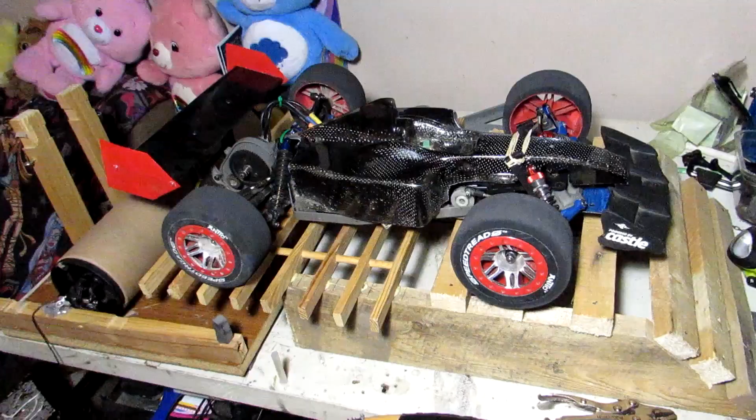We're gonna do a power run with it. I'll show you how it's set up momentarily here. On 2S, we'll do a power run, and then we'll compare that with a 3S. So hopefully this goes over well. So first we'll go over what the car is. This is Megas. He's built from a two-wheel drive Rustler. I guess you have to say that now because there is a four-wheel drive Rustler on the market.

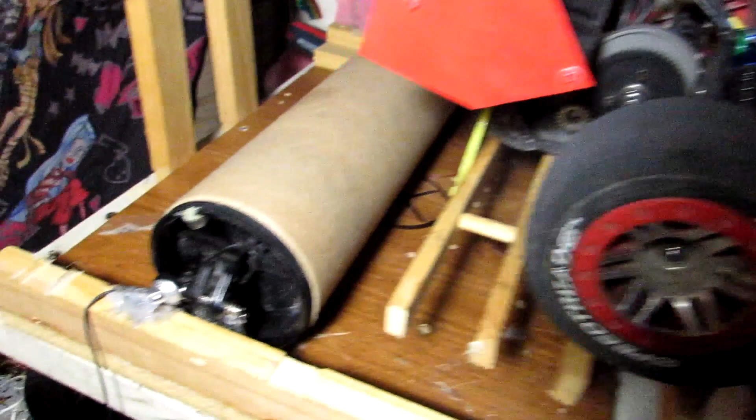And here's the dyno. You can see the magnet that I'm using for the sensor there. And then you can see the other part of the sensor being the headphone, and it's being used as a line-in or a microphone to be able to detect a blip every time that that magnet passes it. It's essentially how it works after entering all the information into here. So let me finish setting up this camera. I'll set the car on the dyno and we'll get at her.

Well, I thought before we jump into the action I should actually explain the software to you guys, hence why I've come back in time to re-record this segment. Don't ask. By the way, that's a lovely Dalewood, and the old Dalewood bridge that's gone, that's in the background.

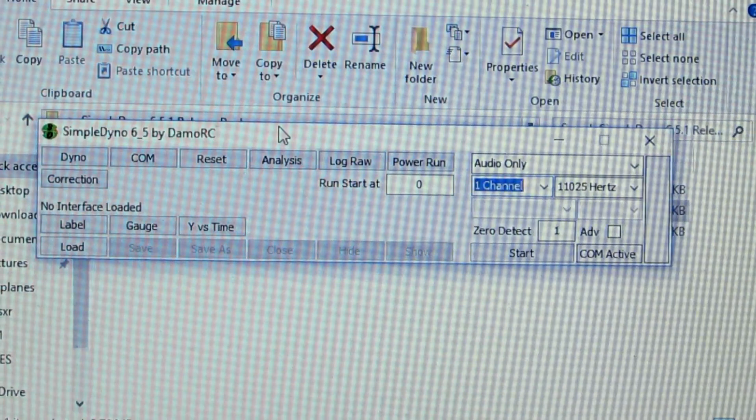Local thing. So the program we're going to be using, it's called SimpleDyno 6.5.1. It's the latest release package, and yes, it is a small program, it's only about 10 megabytes, doesn't take any resources to run, so the cheapest laptop could actually run this thing. So upon double clicking, this is what we see. So yes, there's a lot of information to go over, and as I figure it out, I'll explain to you guys. There will be more than just this one. This is why this is the dyno video number 1.

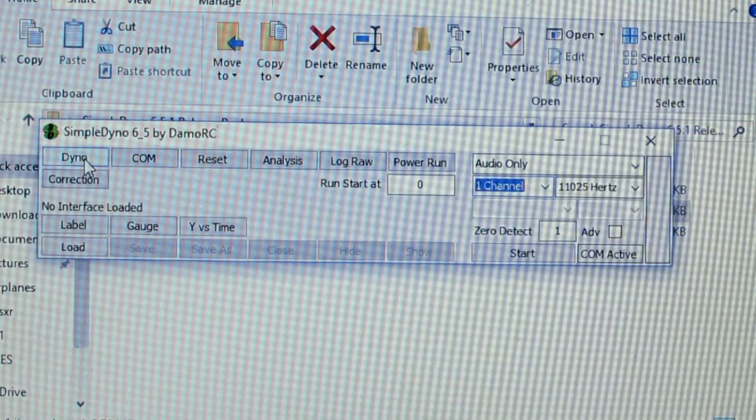When we start out looking at this, I guess the easiest way to show you is just to show you. We'll click on this button here, start with the very first. Where do you start with any of this stuff, right? So let's go right here, click on dyno, and this is what we get. This is where you enter in your non-critical parameters, so if you really have all the information and you want to add it in, this is where the non-critical parameters go. Fortunately, you don't have to enter that in, but this you do.

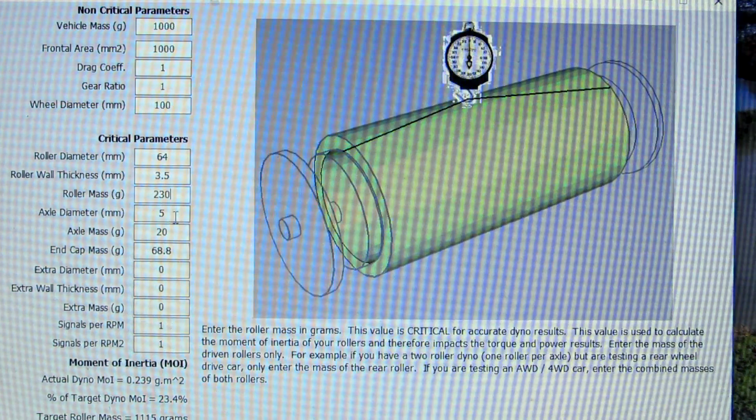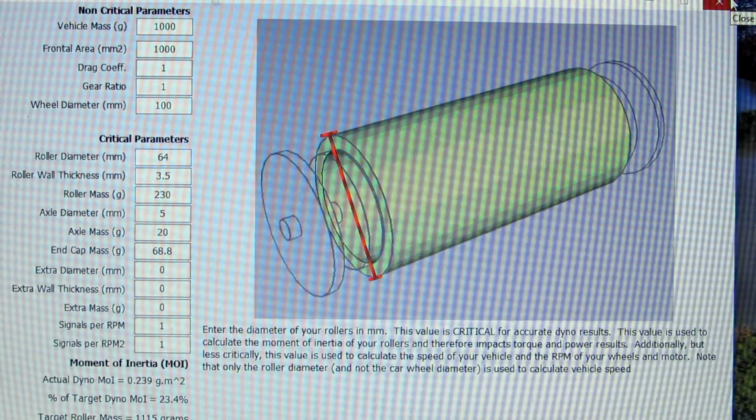And as you click on each different field, you see how the information changes. Everything down here changes as well. That's because they're giving you pretty detailed instruction of what each parameter is used for and why it's critical, and of course up here why it would be non-critical. So we'll close that so I don't accidentally change something important. And back to this screen, the COM button.

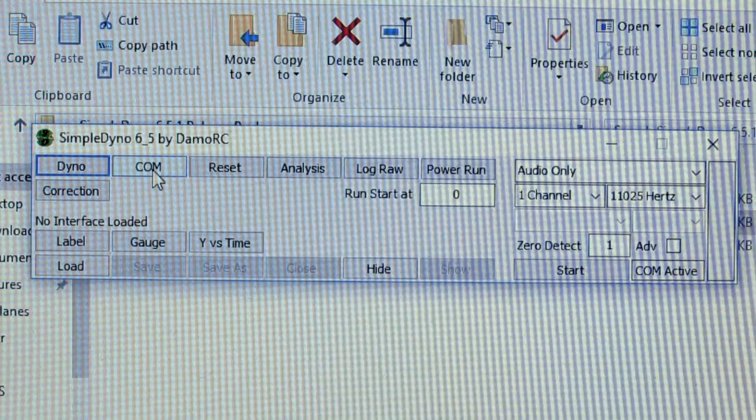What this gives you is access if you have the Arduino board that you can order. It's a pre-programmed board that you can hook up through the speed controller, and it records various information like your volts, your amps, of course wattage, the multiplication of the two. And you can cross-reference those with any point during the dyno run and see exactly what the car is doing. Helps a lot with tweaking and setting it up the exact way you're going to need it, or it might give you information on how to get more power, which is always great. But we don't have a COM, so we're not doing that. Reset button, pretty self-explanatory.

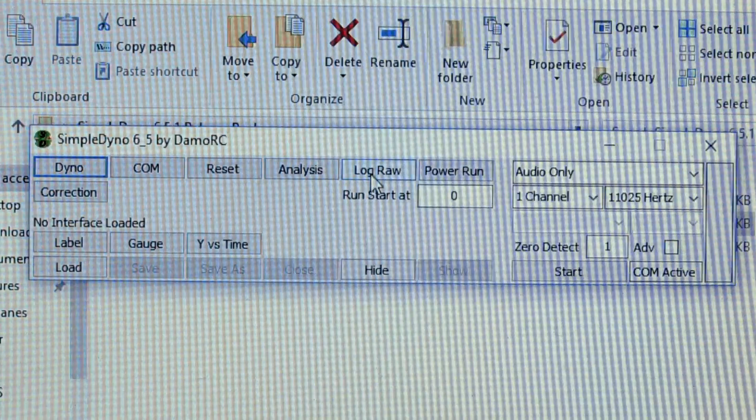Analysis, this gives you a graph that I haven't figured out 100% yet, so we're not getting into that today. This log raw button, what I'm pretty sure it does, it starts the software being active, so it actually starts recording, but not in just a simple one-run shot. It'll do it until you stop it. I might be wrong, but we'll get to that at a later date.

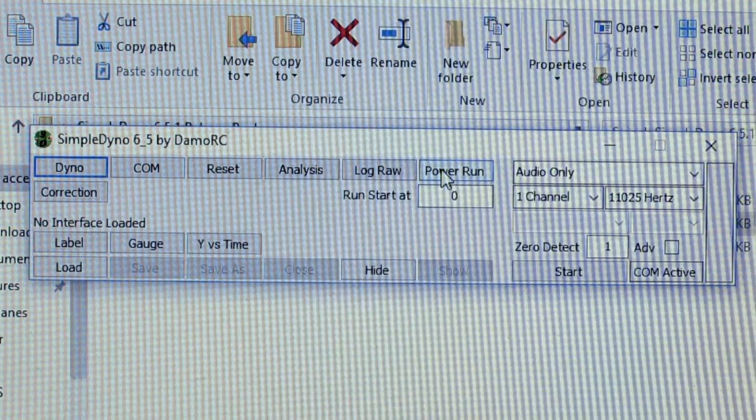The power run is what you're going to see here today. We'll show you what happens when you hit the power run button in a couple minutes. So just bear with me. We are going to do a dyno run, and it involves this and then this, clicking the start button. I want to show you guys two more things real quick before we jump into that dyno run.

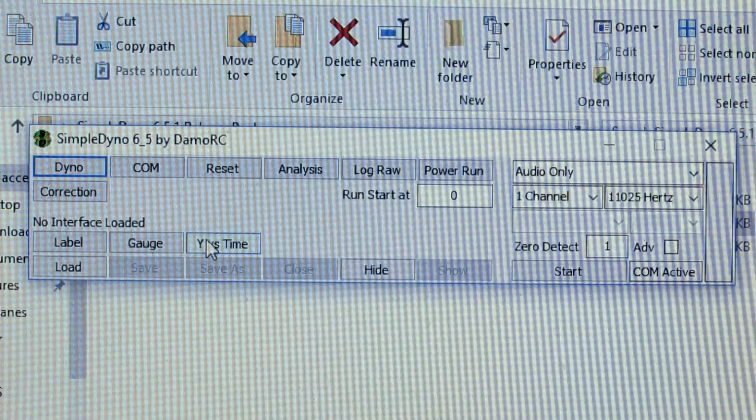This is the graph setup for the active information. I'm not sure that's actually what it's called, but that's what we're going to call it for now. This is your on-screen information, what you see before the end graph pops up. Anyways, let me just show you. Alright, now normally I wouldn't have it open to this size. This is like almost a full screen, but I want it large enough so you guys can get an idea. Here's your parameters along the Y column, and then time is your X.

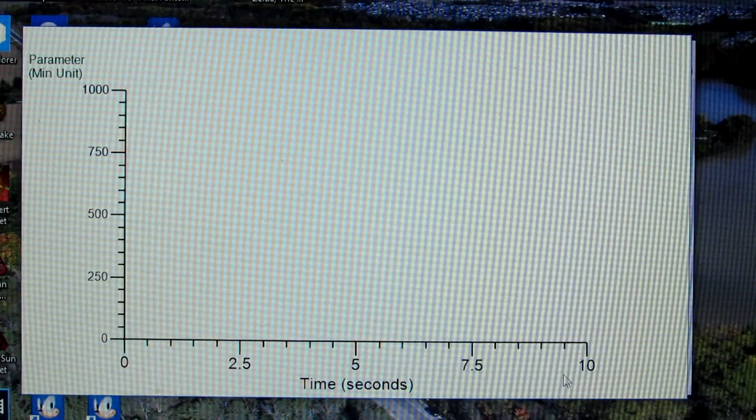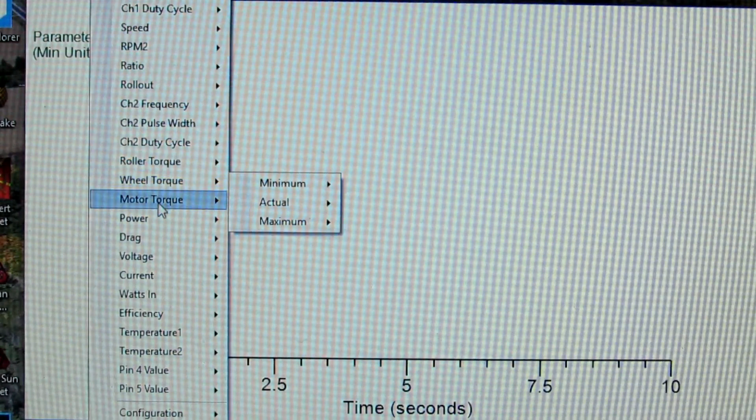What you're going to do with this one here is when you right click, it gives you a whole list of options of things you can use, from RPM roller, RPM wheel, RPM motor, channel frequency, pulse width, important things like speed, roller torque, wheel torque, motor torque, power, drag, voltage, current, watts, efficiency, temps, and then you can change the configuration of it all. So let's see, we'll put speed as this column, actual in kilometers an hour.

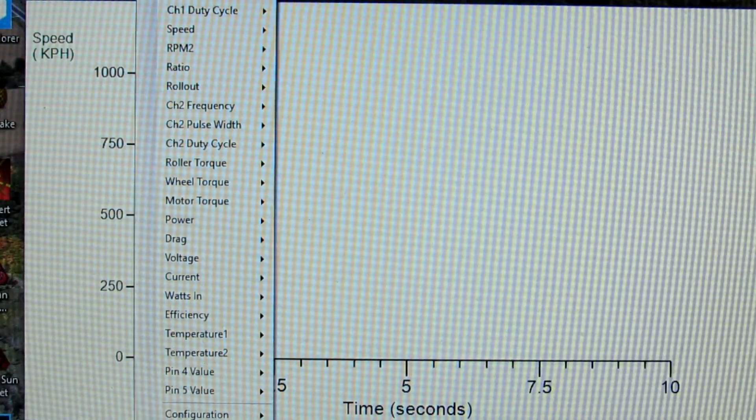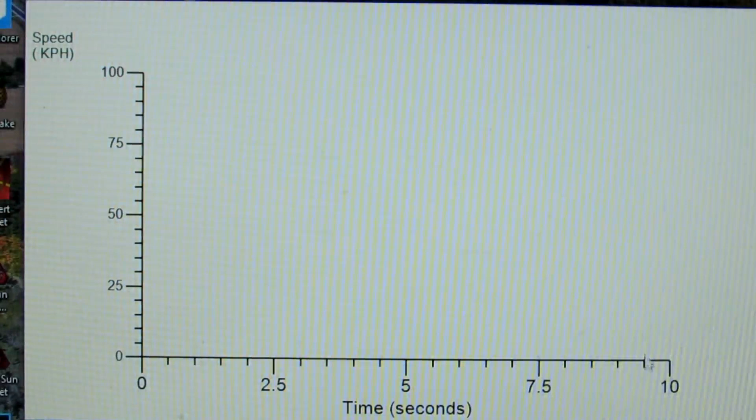So I just changed this up here, you see that? Okay, now there's no way we're doing 1,000 kilometers an hour. We wouldn't even barely show up on that graph. So when you go down to the Y range, minimum, maximum, the box is empty. As you click on that, I don't think my car is going to go any faster than 100 on these runs, so we'll make it 100. This will make it so you can actually see it. It's pretty neat, eh? Alright, now for the gauges.

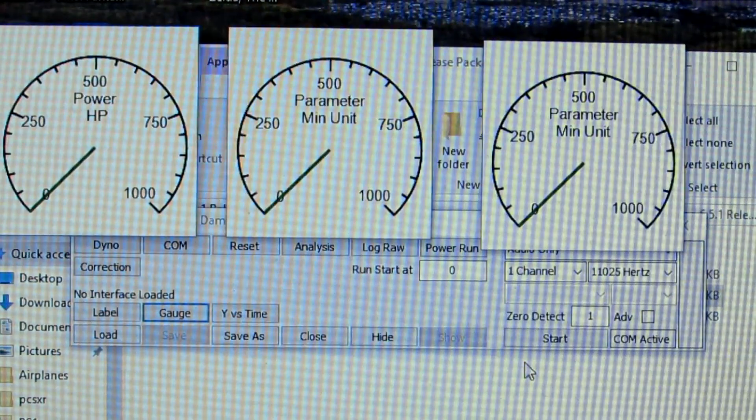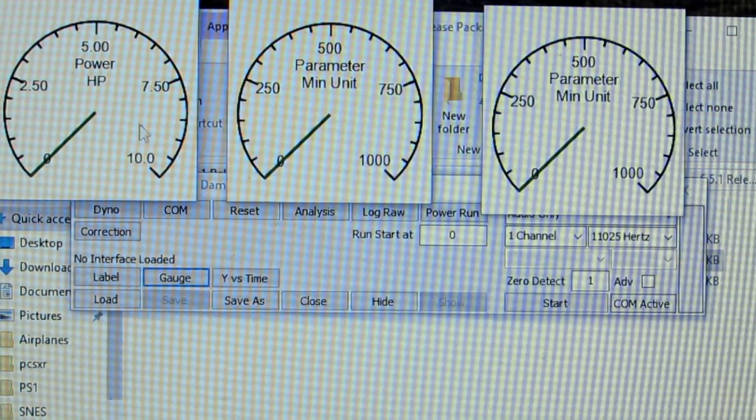Okay, I've opened up 3 gauges so you guys can see them. Again, you right click it, you can change what parameter you want set up. So for this one, we'll put it at power, actual power, so you can measure it in watts, kilowatts, or horsepower. And again, you see how it says 1,000 horsepower. I'll go down to range, set the maximum to, well, I don't think my car is going to have any more than 10 horsepower. There you go. See, that's at 10. And now you should be able to see that move, and you can actually set it so it'll hit the maximum and stay there, or you'll see it active throughout the run. That's why I called it active information.

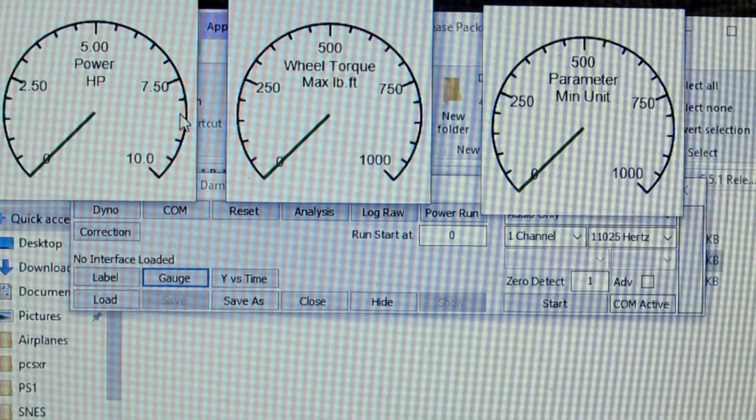So what else could we set up there? Well, I think you'd be measuring torque. Let's put it at wheel torque, actual wheel torque. Actually, no, we'll go maximum and set it to foot-pounds. So you guys kind of get the idea of how you use the gauges. I'm going to go ahead and set this up for a run, and then we'll do a power run.

Okay, Megas is on the dyno. If you look right here, this will be where my sensor reading is coming across. This is going to give us our speed over time. The power, I haven't really gotten this set up 100% to show the range of the power, because, gotta admit, we're not putting out a lot of horsepower by these digits. Same with the torque. I don't expect to see anything in the torque, but we'll give it a 2S power run here. I just gotta fire up the car. Gotta make sure it's all aligned, right?

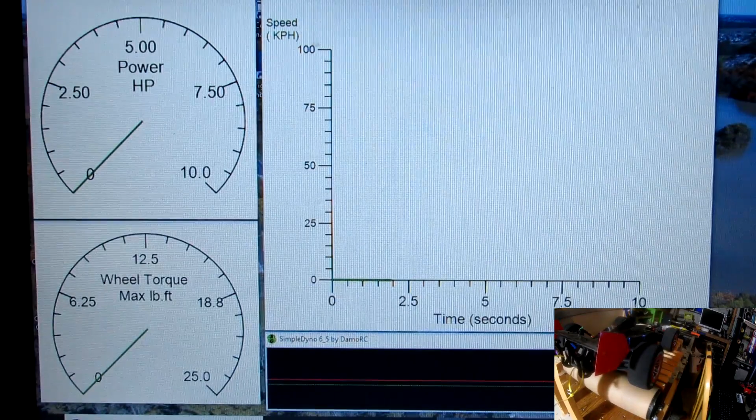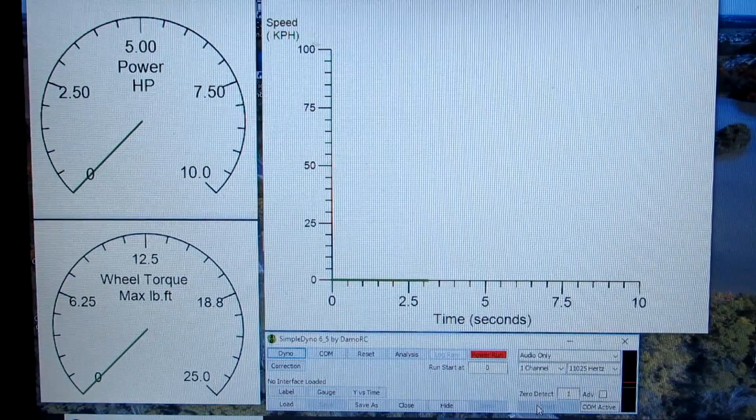Okay. So you can tell it's definitely picking up the sensor right here. You can see all our options down here, and mind you, I've used this program less than 10 times, so I'm still figuring it out. But we're setting up for power run. We'll go test, save it there, and now it's ready to go. All I gotta do is hit start and we're underway. Ready? Let's do it. Set it up to speed a little, and then we'll pull the trigger.

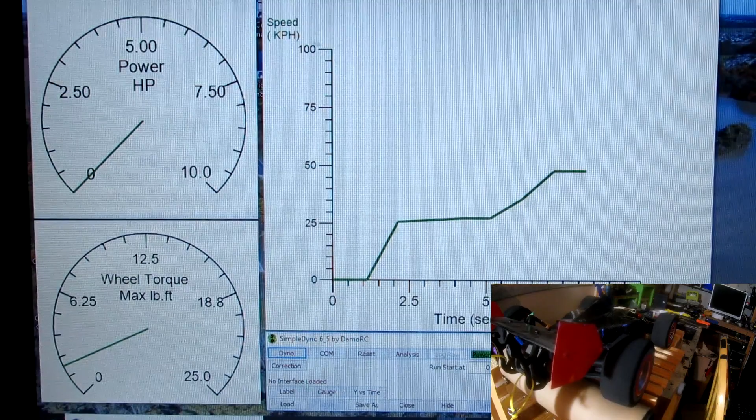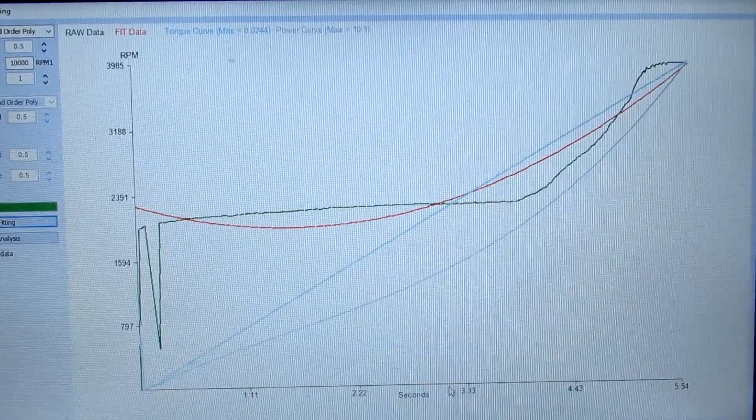And there's our output graph, just like so. Let me adjust the camera a tiny little bit. There you go. Now we'll do this one more time, as closer to a full pull from a dead stop. Alright, power run. We'll call it test 2. And here we go.

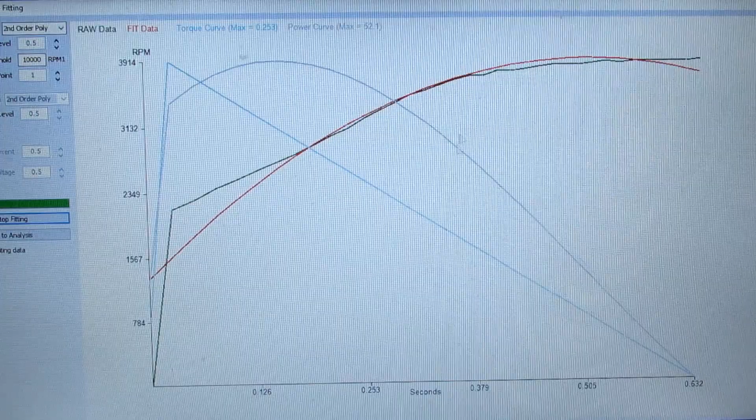And you can see the output graph is kind of showing us a little bit of instability near the top end here. But this is all more things to be figured out. This green line is your raw data line. The red one is your FIT. Still got to figure out what that is. So if you're familiar with this program or dyno programs in general, I am looking for some input to help improve my understanding and be able to utilize the program even better.

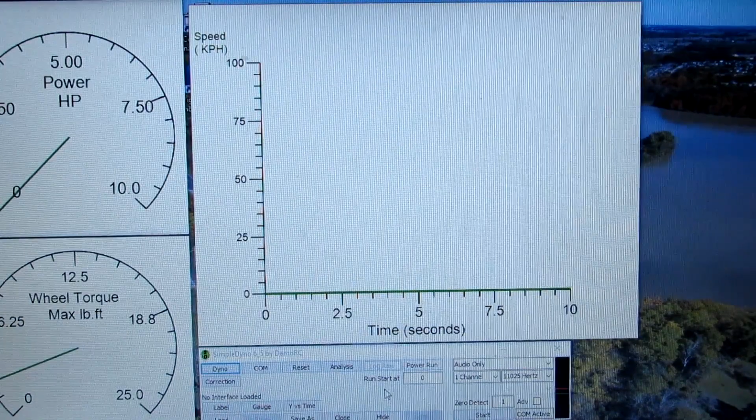So that was the 2S run. I'm going to switch over to a 3S battery, and then we'll do a 3S run. Okay, the 3S is in, and I noticed, look at that, we almost hit 3 pounds of torque. 3 whole foot-pounds of torque. Okay.

Oh, Mega, sit where you're supposed to.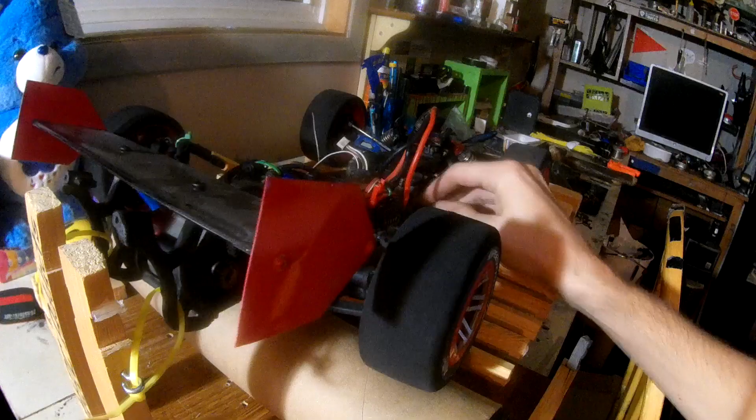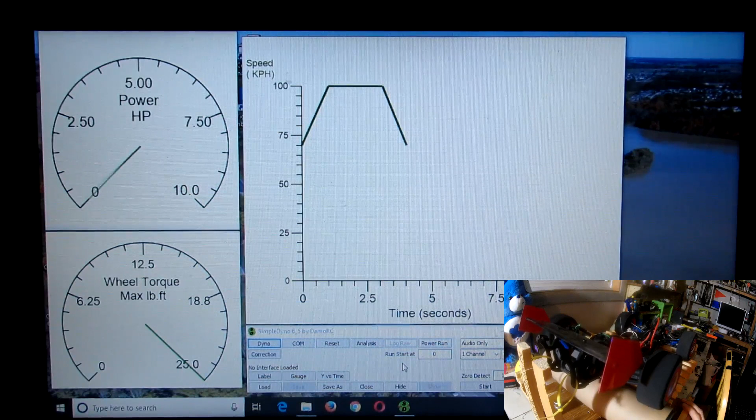Alright, you ready? We're just going to do a little quick test pull here. And the dyno's moving. Okay, we'll try that again. Okay, well I have never tested it with a 3S, so that was unexpected for it to shoot up that high. Let's try it in a power run. Ready? We'll do power run. We'll just call it 3S. Okay guys, hold on to your seats.

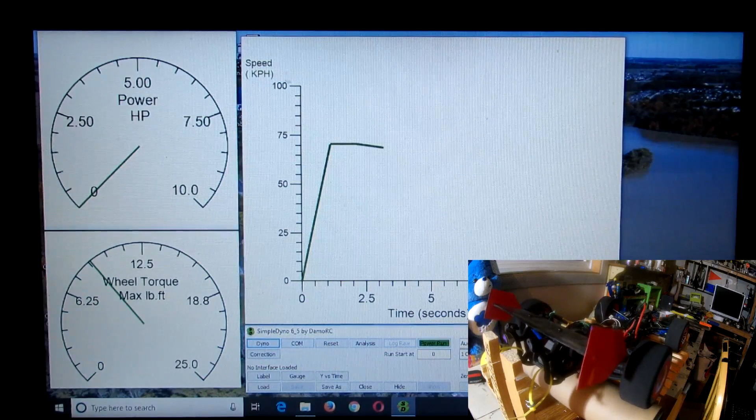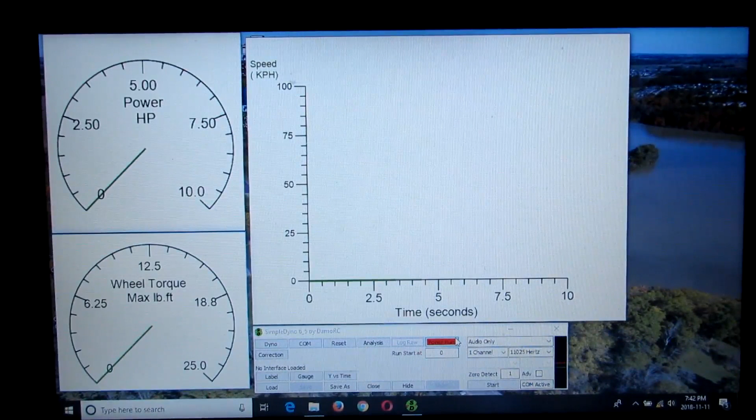Wow, that's a much different curve. You see, it is different. It's a lot different than measuring the 2S output. I'm not sure the camera's showing the whole width. Yeah, it is. Okay. We'll do one more. That was like a gradual trigger pull, so we'll do another quick 3S power run here. Call it 3S2. Alright, ready? Almost a pull from a dead stop. Here we go. 3, 2, 1.

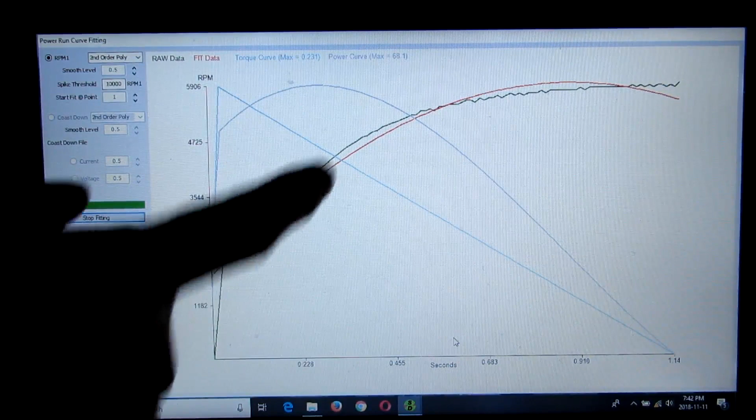And yet again, another different power curve altogether. You can see in the top end, it's really getting unstable there. But this is giving us some data to work with. So yeah, there's still quite a bit to be figured out about that software, but I'm pretty confident that I'm on the right track for setting it up and getting some actual numbers. I mean, with the 2S, I know that car's not going to go any faster than 50 miles an hour at best, maybe only 50 kilometers an hour, but I'm on the right track. At least it's sensing the data and it's starting to actually record some data and show the power curve and everything properly on a power run.

And to me, that's cool. I really like that. It's going to be a really handy mode of data acquisition, gaining numbers and figuring more things out, and coming at it with another approach. What for? Just for something to do, because to me that kind of stuff's fun. Anyways, there will be an all-wheel drive dyno. I mean, it's up here right now, and then I have to get the resources and make it real. We do have a few all-wheel drive cars in the group and around. I've got the Stampede, Chewy's got Odie, so there's a good call for it.

I still, though, would really appreciate any information, any input, but I just don't want sarcastic opinion, okay? If you have an actual knowledge-based opinion of how these dynos work, please get a hold of me. I really do need some help with some input.